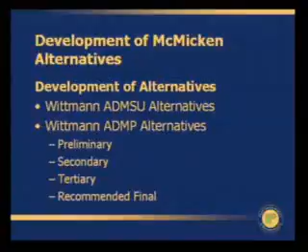Thank you, Mayor, members of the council. The Flood Control District has been working on looking at McMicken Dam and alternatives for it for some time now. We started out with a study back in 2004, the Wittmann ADMSU, and then most recently our current study, Wittmann ADMP, where we went through a series of alternative analyses, preliminary and secondary, and we're to the point where our team has recommended an alternative. The alternatives we've taken to this final study—there are basically 3, with one of them having several options, and I'll talk briefly about that. But first, just a real brief reason why we're doing this.

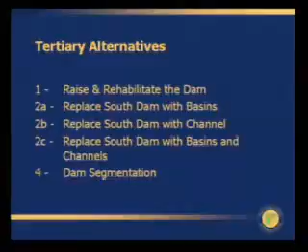McMicken Dam was built by the Corps of Engineers back in 1954. The dam design and technology was much different back then. McMicken Dam's purpose was to protect Luke Air Force Base and cropland, and it has a much different purpose now. We've been actively monitoring, maintaining, and keeping up McMicken Dam, but it is time to look at either replacing it with some other type of structure or rehabilitating it as a dam.

McMicken Dam not only consists of the dam itself, which is about 9 miles long, it also consists of an outlet channel which crosses Grand Avenue and then discharges into a natural wash that ultimately discharges into the Agua Fria. So we're looking at the entire system—landscaping, theming, different concepts as part of that. We've gone through and assigned themes to it as we've gone through our alternative process.

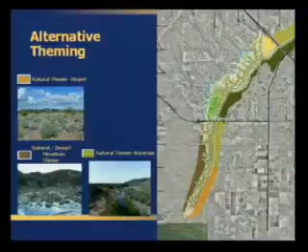We've come up with a multi-use concept for McMicken Dam: a recreational, passive recreational corridor, an open space corridor with a scenic backdrop, in conjunction with the Maricopa County Parks and Trails.

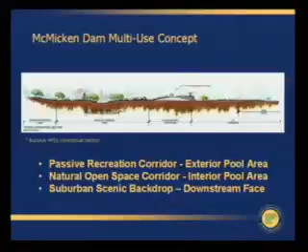We've carried that forward. The first alternative was simply a rehabilitation of McMicken Dam. That means we raise the dam, and where earth fissures are predicted or anticipated in the future, we construct one type of structure, and where we don't, we construct a typical dam-type structure. In all these alternatives, north of Sun Valley Parkway, we determined there is no alternative we could effectively put in place other than rehabilitating the dam.

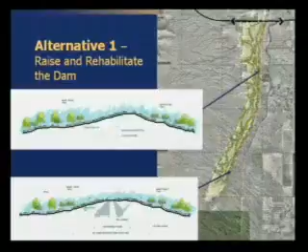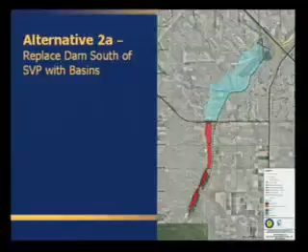We've looked at channels and basins north of there, but the volume of inflow is just too great. South of Sun Valley Parkway, though, we have a lot of alternatives and options, so we looked at those. One is a series of basins south of Sun Valley Parkway. The shaded areas near the bottom are our earth fissure risk zones, so we have to take special precautions there—it's a different type of design. For basins, that's an expensive alternative.

We have a lot of limitations where we have the earth fissures. You'll see we have no trees or anything like that where we have anticipated earth fissures, and that's because we have certain structures buried in the ground to protect the area from the earth fissure.

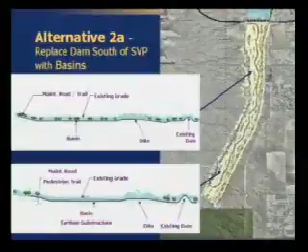Another option is a channel to replace the dam. This one, though, would require us to go outside our property boundary and purchase some state land, just to get the drainage and flow to work, even taking subsidence into account.

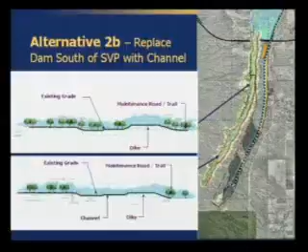Again, some concepts we looked at different types of treatments for the earth fissure risk zones versus the regular zones. Then we looked at a combination of basins and channels—putting channels in where we have anticipated earth fissuring and basins where we don't.

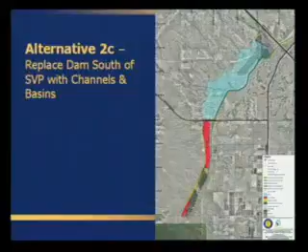Again, some different concepts we looked at, taking into account the landscaping and the multi-use concept.

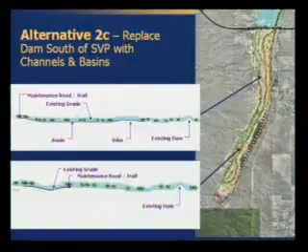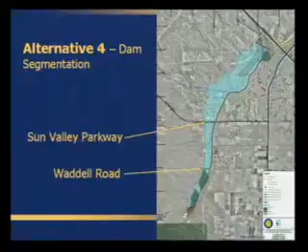Another alternative was basically to maintain it as a dam but to segment it. This option allowed for roadway crossings, and we looked at segmentations at Sun Valley Parkway and Waddell Road. When we finally went through this, we realized this is just an option to alternative one, the dam rehab, so we set it aside. It's something we can implement at any time if we choose alternative one. We also looked at some concepts of what that might look like for a roadway crossing of McMicken Dam.

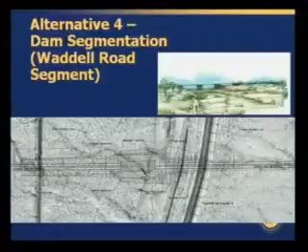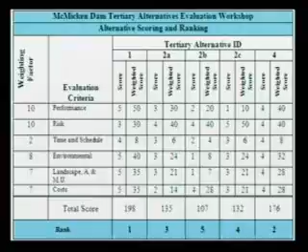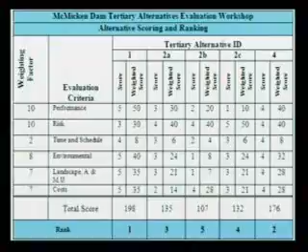We went through a process of scoring and ranking, looking at performance, risk, time and schedule, environment, landscape, and cost. As you can see, our number one, highest-ranked alternative was the dam rehab. A big part of that was cost—that option was about $91 million, versus some of the others, which were much higher.

Where we're at now, our study team has recommended alternative one, the rehab of McMicken Dam—basically keep McMicken Dam as it is, but design it to meet current standards and give it another life for another 100 years. Funding, though, is a major issue we're dealing with.

We've tried—I've been working with the Corps of Engineers to try to get them involved as a partner. We have a study agreement with them, but they haven't been able to fund their part of that agreement. The importance of that is the federal matching funds during construction, which is actually 60%. So we're still pursuing that.

Until we exhaust that effort, we really can't move any further with developing this alternative. If we can get the Corps involved, that's going to involve more studies and could potentially lead to other alternatives being considered, so it's important that we exhaust that effort. Right now, we have no partners. We're looking at maybe phased construction if we can't get a partner or support in that effort, building different components at different times as funding becomes available.

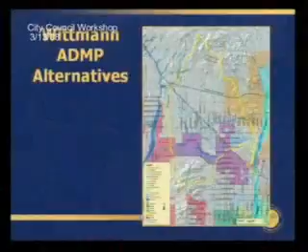Quickly, the Wittmann ADMP alternatives. This study has been going on, believe it or not, since about 2004. The first part of the study was ADMS, where we tried to identify some flooding hazards. That part was completed in about 2006. We did some floodplain delineations, and the city also went out and did some additional floodplain delineations.

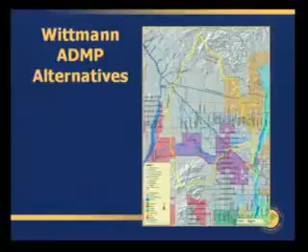As part of ADMS, then we go into ADMP. The ADMP is how we come up with some plans for the flooding hazards identified. There are some flooding hazards within the Wittmann ADMP. So let's go through where we're at right now.

Right now, we just got completed with level 1. I know this isn't very clear. What we're doing is moving forward. I'll point it out from over here if you don't mind. Basically, we're right in here. Just a second, we'll get you a handheld.

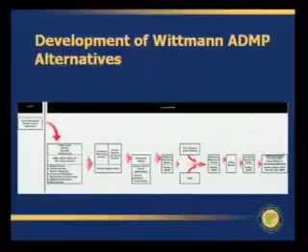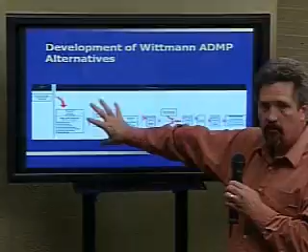Basically, where we're at is right here. We just got done with the level 1 alternatives, which is where we find all the hazards data collection that I talked about. The study team came up with 5 brainstormed ideas.

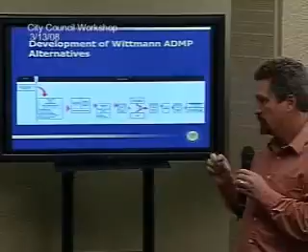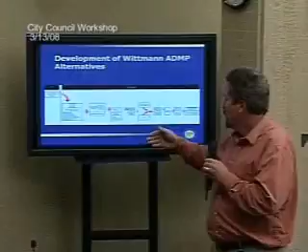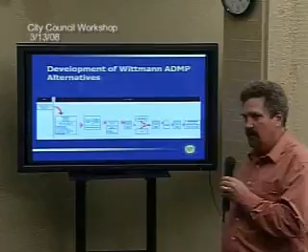Then we took that to the stakeholders, which included members of your staff. We're in the process of revising some of the specifics with those alternatives, and we'll probably show those at a later date. I'm just going to describe them at the end of this presentation. Eventually, what we're planning on doing is getting your input, another advisory committee's input, then eventually taking all that information to the April 8th meeting. So within the next 3 weeks, I have a lot of work to do.

Just to give you a rough idea of our current schedule: after that, we'll go back, look at those 5 alternatives, analyze them, basically do what you saw with the dam, figure out a way to rank them, and then move them forward. So let's go on to where we're at.

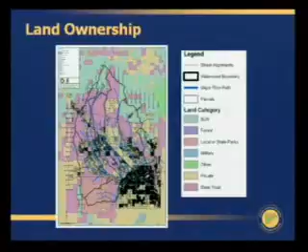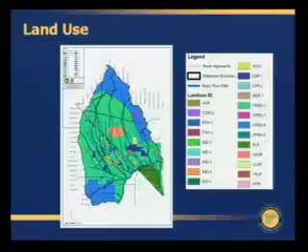What we did is a very GIS-intense effort, and we took a whole bunch of different layers. The things we considered are very similar to what happened on the dam: we considered land ownership, we looked at land use. This actually comes out of your general plan and also Maricopa County's plan, because you guys don't have all this area, and also Peoria.

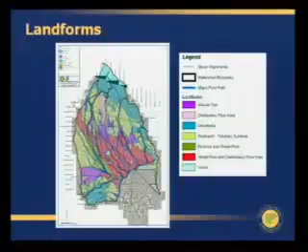So that's that, but there are also some others, and I'll show some of the flooding occurring out in this area. We also took into account landforms. We're trying to be very conscious of how we propose a project, and that'll be evident when I describe the 5 alternatives we're going to go forward with.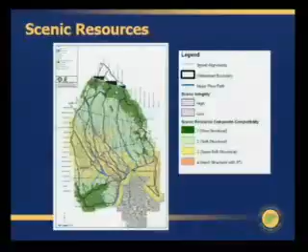We included scenic resources. This is how it looks - if you look out at the distant view, that mountain is beautiful. Or conversely, if we go look at maybe some of the sand and gravel areas, you might not say that looks too nice, but that's a matter of opinion too.

Anyhow, we also considered some of the environmental factors - there are wildlife corridors and cultural issues out here. So when we propose a project, and we're going to propose some basins and channels through this area, we try to take that into account.

And of course, the ecological considerations too. We've got to worry about the birds and the bunnies and wildlife corridors that I mentioned earlier. We incorporated your general plan, parks and open space. We included, as Mike mentioned, the Maricopa County Regional Trail. I know that's incorporated into your parks and open space, along with Peoria's, and we're making sure we look at that to see how we can actually help implement it.

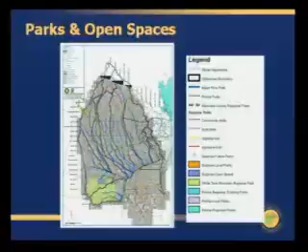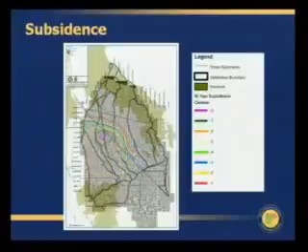Mike was talking about subsidence with the dam. There's subsidence or projected subsidence in this area too, and you can see basically the epicenter. Right now, our current study, which is in draft, is showing about 8 feet of subsidence at that epicenter along US 60. That's something for us to be concerned about, not only with drainage but other infrastructure that the city, county, and states would be putting in.

I'm going to sidestep on the subsidence just a little bit to remind you: back in '93, Luke Air Force Base was flooded because one of the main channels, called Dysart, actually flowed backwards and helped inundate Luke Air Force Base. So subsidence is a big issue.

I'm sorry for interrupting, but I don't know what subsidence is.

The ground is actually dropping because of groundwater withdrawal. What happens is you take out a volume of water, and that void, the airspace in between, collapses, and over time the ground actually drops. So as you drive down Reems or one of these other roads, you'll notice these tall concrete standpipes, some of them painted white. At one time, the very tops of those were actually flush with the ground, about 50 years ago.

Here are some of the identified flooding hazards, some pictures that were taken. You can see this is a roadway crossing again—that's one of the big issues. We have a huge problem with sheet flow throughout this area, distributary flow, and alluvial fans. I'll be happy to come back and take a couple hours of your time just on alluvial fans. That's a very unique hazard.

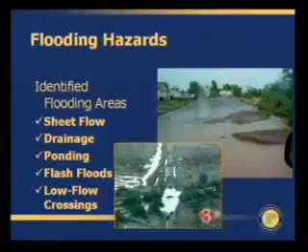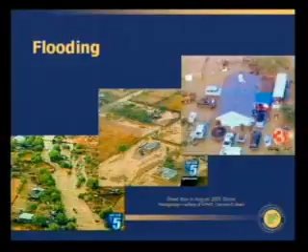As you can see again, here's some more of the flooding in this particular area. Whoops, somebody couldn't get across. Some quick shots—all these flood photos are actually in the Wittmann study area. I'm just demonstrating this has occurred; you can see this was sheet flow in 2005. Let me see that one again... oh, I'm going the wrong direction. Well, I guess we didn't upload my latest one.

The alternatives—we actually have 5 alternatives. I said I was going to describe them and not really show them to you. The first one is what I'll call the do-nothing alternative. All we're going to do is go and finish the delineations. Right now we have about two-thirds of that study area delineated, so that one is just regulatory—continue on with the delineations.

The second alternative is basically to try to preserve the floodplains. When we say preserve, that means try to either acquire the land or keep people out of it. The problem with that one is about two-thirds of the study area is in some sort of floodplain, so it's going to be appropriate in some areas but not throughout. So what you're hearing me say is we're going to end up seeing a combination of these alternatives when we get to the final one.

The next alternative is a multi-use recreational emphasis alternative, where we try to locate basins and channels near parks and also help with the trails and other amenities. The majority of what we're proposing on that one would be along the CAP and also the MWD canal. If I go back to all of them, they almost all have some sort of structure associated—let me take you back to the flooding hazards map real quick so you can see it.

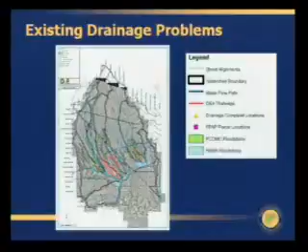I'm trying to visually describe it because as you see this existing drainage problem, that's what these alternatives look like. It's very difficult to see it, so unless I brought you a 6x6 map it would be very difficult, and that's why I was describing it verbally. So with that, I was already down to the very end, which is questions. Can we answer any questions for you?

Mr. Alton: Through you, Chair - right now, is the dam just nothing but levees or dikes on three sides, just holding the water in? Can you explain how that works? I'll take a shot, he's my expert.

Basically, this is a jurisdictional dam. It meets every requirement of being an ADWR jurisdictional dam, which means you have a certain height - I believe it's more than 6 feet of water stored behind it - and a certain volume. McMicken Dam in places is over 20 feet deep, and it stores many thousands of acre-feet behind it. So it is a jurisdictional dam, and there has been water stored behind it.

So we don't have any control mechanisms to direct the flow? No, as part of the dam - does it just flow over the dike? No, we actually have principal outlets that go into it. Here, let me go to the very beginning.

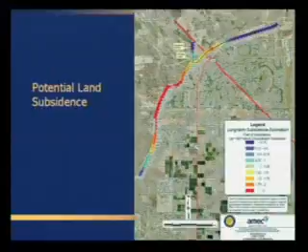Got to go to his stuff. Let's see if I can just get one of these. All right, this shows it. No, let's go up one that looks nice. No. One more. All right, this shows it right here.

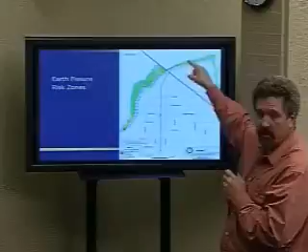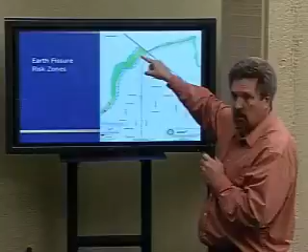Basically, what we have is McMicken Dam from here to here. We have an emergency spillway that directs flows along this line and out. This is a training dike, or what we call the McMicken Dam outlet channel, that takes it over to the outlet wash that ultimately drops it into the Agua Fria River over in the city of, I believe, Peoria - it might even be Surprise, I'm not sure of the limits there. We also have some principal outlets that come in and dump into this same channel. So anytime we get water behind this dam, you'll see water going underneath the railroad and the road, along this outlet channel, and ultimately getting over to the Agua Fria.

How often does that happen? Anytime it rains, once or twice a year we'll get a little bit. Mike, can you answer how often we actually open the gates? Well, McMicken Dam is an ungated structure - there's an outlet at this point. McMicken Dam can store up to about 20,000 acre-feet of water before it discharges over the emergency spillway, which is at this location. But what happens is it collects that water and drains it out, so it's ungated and we don't control it. It doesn't have any gate, so when it hits there, it drains.

There is some storage that will occur, and there will be no drainage, but that's for a 5-10 year storm, something like that. The dam is designed to control anything up to what's called the standard project flood - that's what the Corps designated it as. It's somewhere between the 100-year and 200-year storm. So anything over that would overtop the emergency spillway and discharge out in this area. Our goal is to improve all those conditions, maintain them, look at the dam design technology that's in place now, and bring McMicken Dam up to that standard.

Our goal is to make this a feasible structure for the next 100 years. That was the design intent back in the 50s, but again, it was for the agricultural land and protection of Luke Air Force Base only.

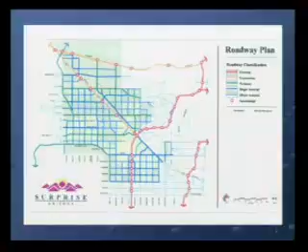This is just our transportation plan map, and we wanted to show you the scope here. Basically, we're talking about the Parkway concept, which I'll show you a cross section of in a minute. We're talking about 163rd Avenue, 187th, 211th, 243rd, Deer Valley, Dove Valley, Jackrabbit, Jomax, and Sun Valley. Not all of these roads are currently in the city limits, but they're in our planning area. Total of approximately a little over 80 miles of parkway in our transportation plan.

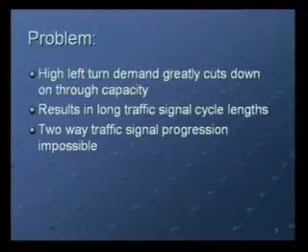So what's the problem? Everybody doesn't go straight. There's a lot of turns at crossroad intersections. So to provide for all these left turning movements, we have special phasing. That special phasing eats up the cycle length, and we don't have much time left for through traffic. We go to long signal cycle lengths, and two-way progression, even with all the ITS or intelligent transportation system technology in the world, you simply can't defy the laws of time, space, and speed. Two-way traffic progression is impossible. So what are some of the alternatives that have been tried over the years?

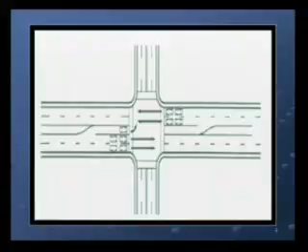The first thing we did conventionally here in the valley is make sure the left turns are opposing each other, like on the east-west road here, with a special phase for them. On the north-south road, there's not even a special left turn lane, so left turns from this crossroad would be very unsafe. This is something we stopped doing probably 40 years ago in traffic engineering.

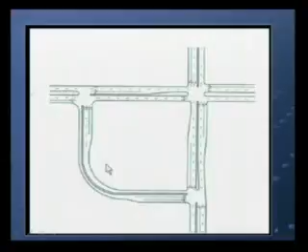This is an example of avoiding left turns at the main intersection by having drivers turn left in advance. They turn left, come around, and then complete their left turn. So if I want to make this movement, I turn left here and come around. That frees the main intersection to not have any left turn phasing involved. The problem is, of course, you're wiping out land here for development, and you're introducing a couple more signals, which could end up with the same problem at this location.

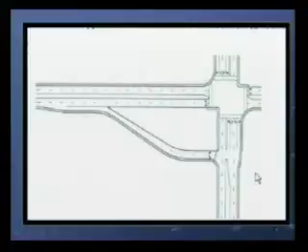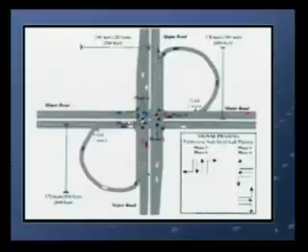This is commonly called a jug handle, where the left turner is really a right turner down here, then makes his left here. That has its own problems at this location. At-grade loops were also tried. If a left turner wanted to go this way, he could take this loop, but as you can see, those eat up a lot of right-of-way, and access to adjacent development becomes virtually impossible.

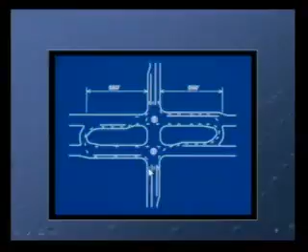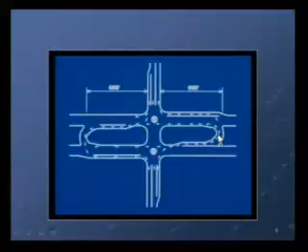That's one of the reasons why this indirect left turn concept, primarily used in Michigan, is so attractive. A vehicle going westbound that wants to go southbound comes through the crossover and then makes a U-turn and goes right. A vehicle on the side street going northbound wanting to go westbound isn't permitted to turn here, but instead makes a right turn, then a left turn, a U-turn, and continues on its way. This seems like a lot of adverse travel distance, but we'll see in a minute it's actually a lot more efficient.

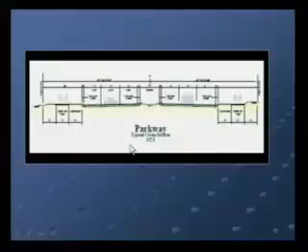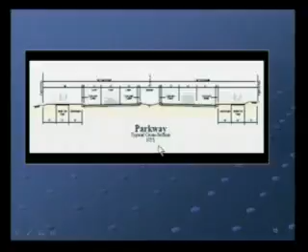This is an example of the Parkway cross-section adopted by council back in December of '05. The median here is kind of distorted scale-wise - this NTS means not to scale. It's already 60 feet wide, so it's not really clear how wide this median is. But this would be the major arterial cross-section, and this would be the minor. The primary difference here, besides the indirect lefts, is that the minor arterial right-of-way needed is 110 feet, the major arterial is 136 feet, but with the Parkway, we're looking at a 200-foot cross-section for right-of-way.

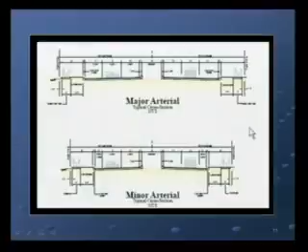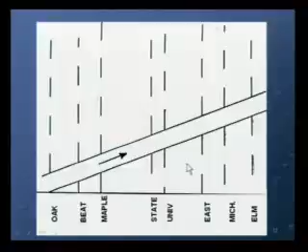The dark lines indicate the red of a signal, and the clear space is the green. As you can see, a vehicle traveling down the road keeps getting green lights, assuming it goes at the speed represented by the slope of this line. You've got time on the y-axis, distance on the x-axis, and the slope of the line is the speed. This driver is very fortunate because we timed the traffic light so he never has to stop once he gets started.

Unfortunately, the driver in the opposing direction gets stopped just about every time. That's what happens when you have poor spacing - it's almost impossible to progress both directions.

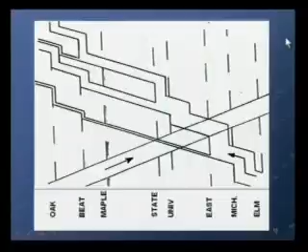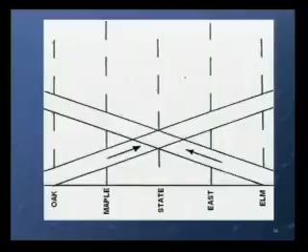But if you have good spacing, in our case roughly a half mile, then with the cycle lengths we'd like to run, 80 to 90 seconds, you can get 40 to 45 mile an hour progression both directions. That's important because as much as we think we have a lot of directional traffic where we could progress them in the morning down to Phoenix and back home at night, we're just not finding that kind of pattern. There's not that big a split.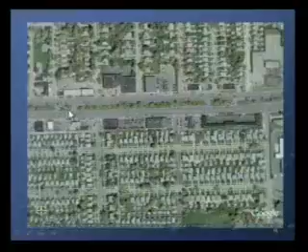These crossovers also facilitate pedestrian crossing - you can see the sidewalks between the crossovers. That means a pedestrian on the south side of the road can cross here using the crossover signal, then walk on the sidewalk and cross the other side of the street using the signal on the other side. Because those signals are independent, they don't screw up the progression for through traffic.

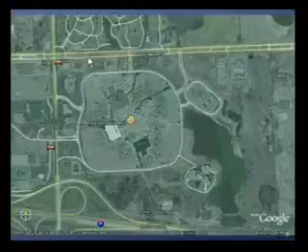These are just a few examples of real intensive commercial areas served by indirect crossovers and boulevards. This is a very popular one, Fairlane Mall in Dearborn. Another good one, 12 Oaks Mall in Novi. Notice these are all served, at least on this road, by boulevards with indirect left turns.

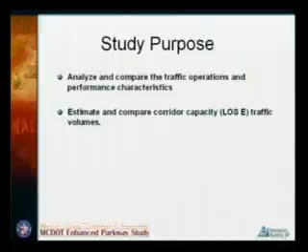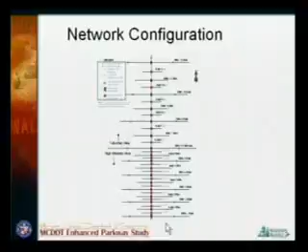I'll close by giving you some results of a study conducted by MCDOT. They hired a consultant to test whether this indirect left turn boulevard concept, parkway concept, is really beneficial. They compared this roadway network - it's not necessary that you see it - with crossroads at every half mile. That was the network they tested.

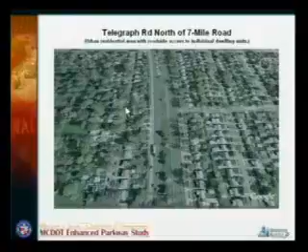They loaded it up with traffic, and while the simulation's running, I'll give you some more examples about how these boulevards are very aesthetic, very pleasing in residential areas, in more dense commercial areas, even in some manufacturing areas, and some real heavy commercial areas.

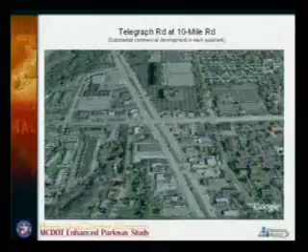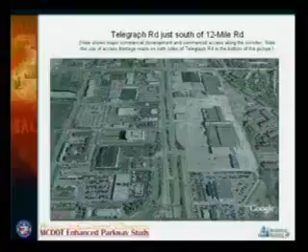And this is probably the granddaddy of malls in Michigan, 12 Mile at Telegraph. Look at that. Look at that density of the commercial and industrial area.

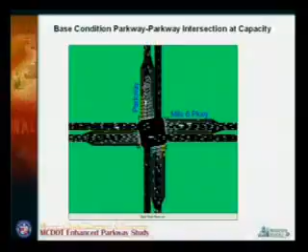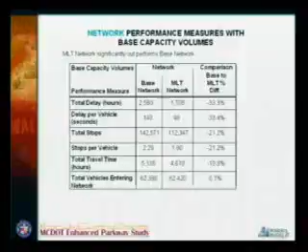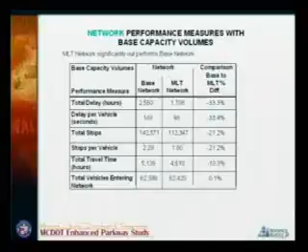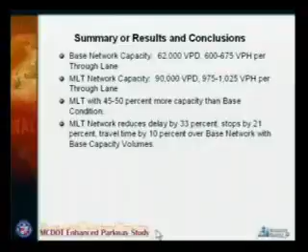So the bottom line is that the Michigan left turn carries 90,000 vehicles a day. The base network we're using today conventionally carries 62,000, and the capacity is 45 to 50% greater using this concept. So thank you, and I'll answer any questions.